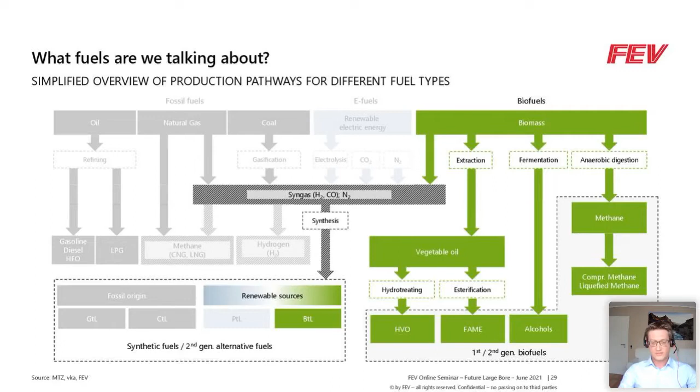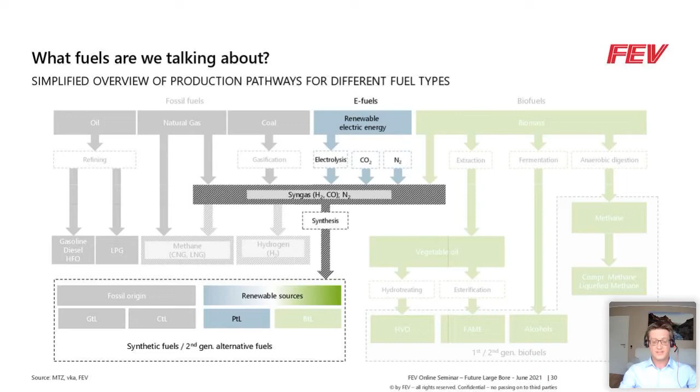E-fuels are what pretty much everybody is currently talking about, and the main characteristic of e-fuels is that the basis for all e-fuels is green hydrogen, derived from water electrolysis by means of renewable electricity. By combining the green hydrogen either with carbon dioxide or with nitrogen, you can produce pretty much all types of molecules that might be suitable as fuel for internal combustion engines. As indicated, there is not the one e-fuel or the one synthetic fuel. You can really produce many different molecules that are suitable as fuel.

But what they all have in common when produced from renewable sources is that they typically contain no or only extremely low amounts of sulfur. And because the share of high boiling components or aromatics is also significantly reduced, usually all these types of fuels combust significantly cleaner than the fuels we are using today. I'll now briefly talk you through the fuels that seem most promising for medium speed applications, and my colleague Arne Güdden will later talk a bit more about thermodynamics and specifications of some of these fuels.

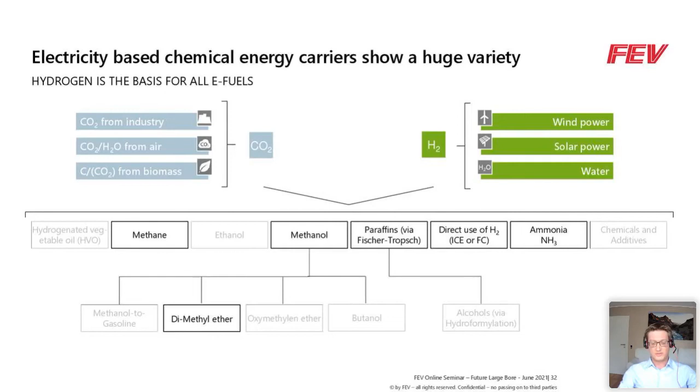Starting with hydrogen, that of course is the simplest e-fuel, if you want. Talking about a green economy, hydrogen will for sure play a very important role in the future, not only for energy storage in the grid, but also for mobile applications. Japan announced that they will import very large amounts of hydrogen from Australia. So it's no surprise that Kawasaki is planning to build a deep sea going liquid hydrogen carrier that will also be operated with liquid hydrogen. And the world's first hydrogen-powered vessel will go into operation by 2024 from the consortium with Orca, powered by nature.

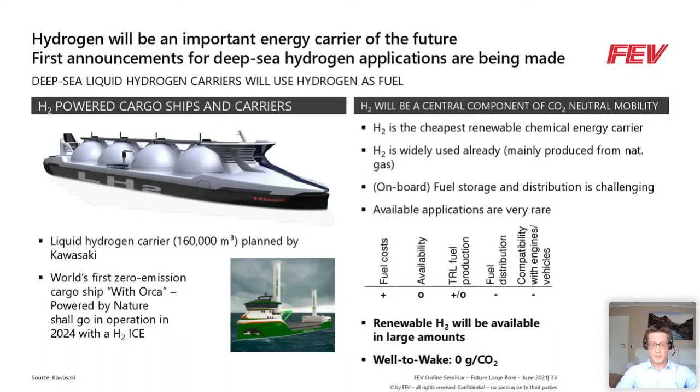The other fuel that is inherently CO2 free while combusting is ammonia. Ammonia has also been used already as fuel, mainly during World War II, not because it's the perfect fuel, just because there wasn't any alternative at that time. Due to its ignition and combustion characteristics, it requires a sophisticated ignition system, such as dual fuel. I think Arne will touch on this later on in a little bit more detail.

Moreover, due to its quite low flame speed, it's also not suitable for applications with very high revolutions, but rather medium speed or even low speed applications. In fact, ammonia is pretty much a hydrogen carrier, since nitrogen itself doesn't actively take part in combustion. So ammonia is, of course, a little bit more expensive than hydrogen, but cheaper than some other e-fuels. The reason for this is that air separation is way easier if you have 78% nitrogen in the atmosphere rather than 400 ppm carbon dioxide.

Currently, ammonia is produced on the megaton scale already, and it's mainly used as fertilizer. It's shipped around the world. So infrastructure would be available, but the downside of ammonia is mainly its toxicity; already very low concentrations of only about 20 ppm are toxic for human and sea life. So there are quite high requirements for safety installations and handling. So ammonia might be an interesting option for large applications or mining sites, for instance, with their own fuel production, far away from civil population.

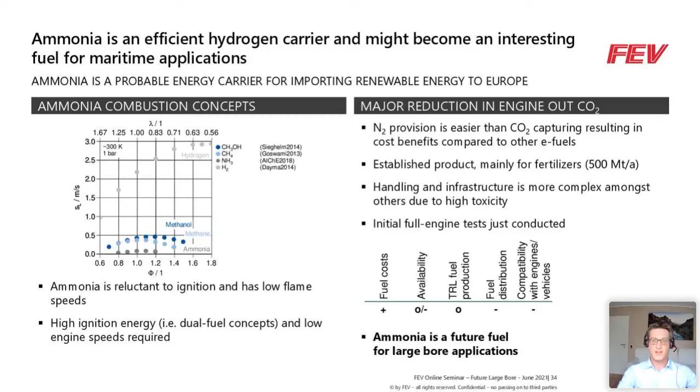Initial engine tests are currently ongoing at full engine test sites. But of course, there are also some pilot and demonstration projects ongoing, such as this ammonia and hydrogen fueled tractor operated on a farm in the United States. They synthesize the fuel pretty much all electric on their own farm, making use of a conventional Haber-Bosch process, the way you do it on an industrial scale already today. The ammonia not used as fuel on the farm is then directly used as fertilizer for the crops. The tractor you see in this picture runs on hydrogen and ammonia, spark ignited.

As you can see, it requires quite a lot of additional fuel storage volume. We talked about the energy density of hydrogen already. Also, the energy density of ammonia is roughly 1/4 of conventional diesel fuel, even in liquefied form.

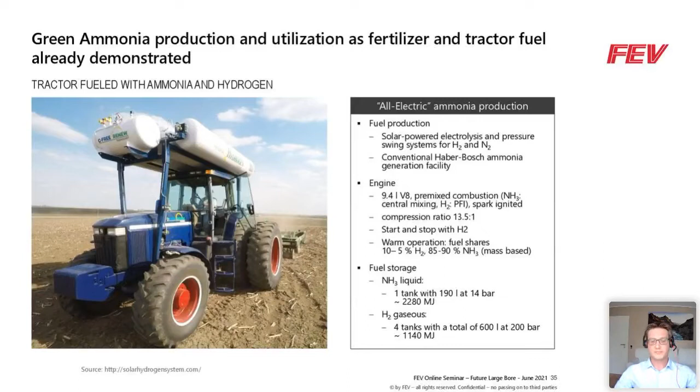The next fuel we're talking about is also gaseous and quite well known: natural gas or methane. Engines running on this fuel have been on the market for years already. Natural gas also enables quite low pollutant emissions. Currently, natural gas is of course a fossil resource, so it's not CO2 free, also not from well to wheel, but it is currently very cost competitive with other fossil fuels. Based on its molecular structure and combustion, it can enable CO2 reduction of up to 15% compared to other liquid fossil fuels.

Talking about synthetic methane, made from renewables: methane is of course a quite simple molecule, but the Sabatier process we would use to produce methane from carbon dioxide and hydrogen is quite energy intense, so it's not the cheapest molecule you can choose. It's a little bit more expensive than other e-fuels we're going to talk about. The good side is that natural gas is available in very large amounts today already, and the grid is very well developed worldwide. So in fact, natural gas would be the only fuel that could be brought into the market on a very large scale, very fast, effectively reducing CO2 emissions by up to 15% with current technologies.

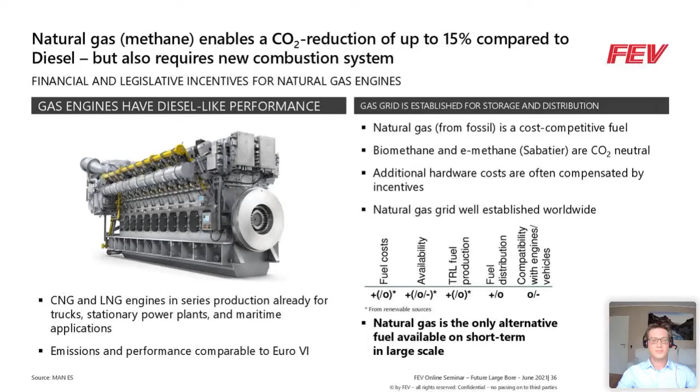With that, we're coming now to the first liquid fuel, which is methanol. Methanol is also used as fuel already, from passenger cars to heavy duty applications to deep sea vessels around the world. There are a couple of methanol powered vessels on the oceans already, I think roughly 5 to 7. Announcements for methanol powered carriers are currently being made, so within the next years there will be more than a dozen methanol operated vessels on the oceans. Methanol is available in more than 100 harbors around the world, also because it is an established product for the chemical industry, traded on a roughly 100 million ton scale already.

Methanol synthesis is also well known. Currently, it's mainly produced from natural gas and coal, but the process would not change if you took hydrogen and carbon dioxide to produce green methanol. The downside of methanol is that it's considered to be toxic. In fact, it's not methanol as such that's toxic, but its metabolic products. Also, it burns with an invisible flame, so here too handling and safety installations have to be kept an eye on. It is anticipated that safety installations will have to fulfill higher criteria than they currently do for conventional diesel fuel applications. So far, applications for pure methanol operation are still limited.

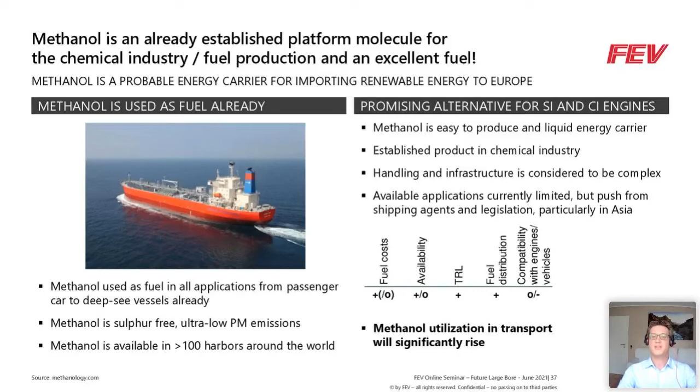We do see a push mainly from Asia, for passenger car and heavy duty applications, but also for maritime applications. And since methanol is a liquid energy carrier that is very easy to store and easy to transport, we think that methanol will be used to import and export green energy in liquid form. For that reason, methanol will surely have its place in future transport.

The derivative of methanol is DME, dimethyl ether. Its physical characteristics are somewhat similar to LPG. So you have to pressurize DME to around 5 bar to get it in liquid state. But simultaneously, it's got a cetane number quite like diesel.

So for that reason, DME has been investigated around the world, from passenger car applications to heavy duty applications, and also for shipping applications, like in the research project shown on that slide. They produced DME on board via methanol reforming with a technology provided by Haldor Topsøe. And they used it in an only very slightly adapted diesel auxiliary engine to operate the auxiliary devices on board directly. So overall, DME is used worldwide in different applications.

So for the United States, there's a fuel standard available already. Volvo investigated this intensively. Currently, from automotive side, Ford is significantly pushing this fuel type, also trying to certify DME as fuel over here in Europe. In Asia, DME is used as cooking gas quite broadly, like we do it here with kind of LPG.

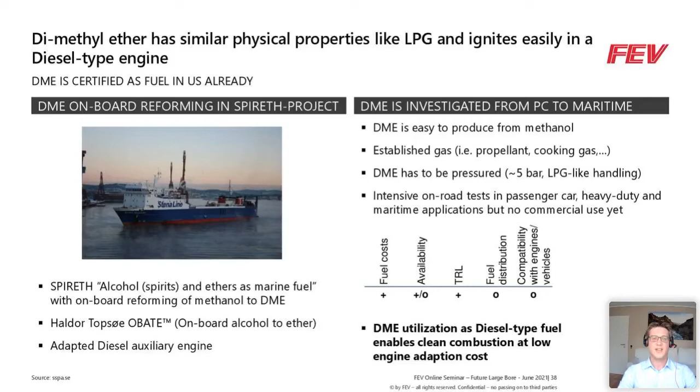Coming to infrastructure and availability of infrastructure. So the best fuel you could think of would be, of course, a fuel that you can directly use in today's infrastructure without any change. And there's pretty much one fuel that fulfills the criteria, and that are paraffinic diesel type fuels produced via the Fischer-Tropsch process. Fischer-Tropsch diesel are kind of drop-in fuels for all diesel applications worldwide.

The downside is that the Fischer-Tropsch process is also quite energy intense, and that makes Fischer-Tropsch fuels to be at the upper range of the fuel production costs, actually. The technology as such is widely known and robust for more than 100 years already. And for Fischer-Tropsch fuels, you might also have more customers at hand, because Fischer-Tropsch fuels are the only liquid fuels that also can be used in aviation. So once ramping up that technology, for sure, there will be a customer at the end buying the product.

Still, when you're looking at the fuel costs, where TCO are of highest importance, Fischer-Tropsch fuels for sure will not be an option. But thinking about yachts, for instance, that have to be refilled every now and then, other leisure boats, or if you have backup power generation, then Fischer-Tropsch fuels might be a very viable solution.

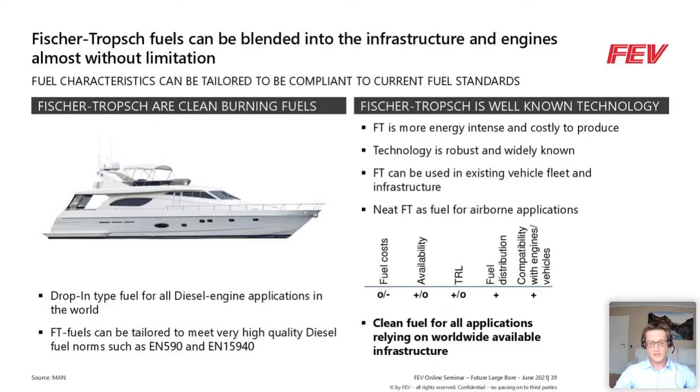So now you might say, okay, fuels are not available. We have had a question pointing in that direction previously. Of course, the fuels currently are not yet available in large scale amounts. The main reason behind this is that there's no one along the value chain who would actually really benefit currently from using or producing synthetic fuels. So politics around the world have to create incentives that there will be an investment in producing such synthetic fuels. But still, we see that there are more and more announcements made. Synthetic fuel production will ramp up.

On the left side of that slide, you can see a figure coming from Fuels Europe. They state that within the next 30 years, we would be able to have 100% of the non-electrified road transport be fueled with CO2 neutral synthetic fuels. And also the target that Andreas pointed on, 50% CO2 reduction for maritime and aviation by 2050, will also be possible by means of synthetic fuels if there would be an incentive to really start off the investments.

Of course, talking about investments, investments we would have to take are significant and really high, but compared to an all-electric propulsion across all applications, it's still cheap, with an anticipated investment of somewhere between 400 to 650 billion euro. On the right-hand side, you see the screenshot of an announced project that is ongoing already, that gained quite high interest in media.

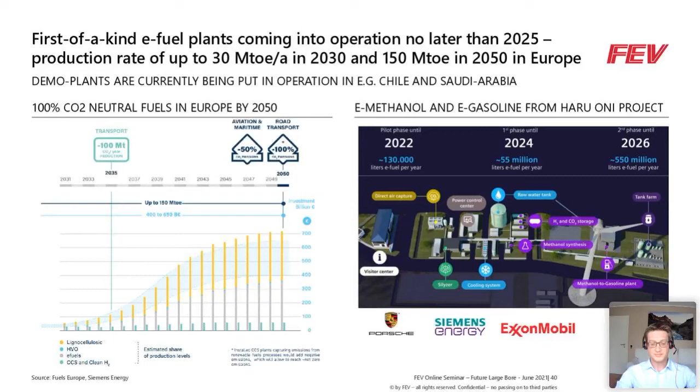So in addition to the critique that the fuels are just not available, we often hear also the critique that e-fuel production is inefficient. Where should all the energy come from? Of course, making direct use of renewable electricity in the powertrain would be more efficient, but often that is just not possible.

You can't electrify all the propulsion systems we do have. And obviously, we are not lacking energy in the world. We just have to make use of the sweet spots like Australia, MENA states, and for photovoltaics, Chile, for instance, for wind power. And given the average solar radiation and photovoltaic efficiency, on the right picture, you can see a blue square, and that blue square would be required for photovoltaic installation to cover the total electricity demand of the world by 2050. So in my view, a rather small spot if you compare to the world landscape.

If you're now going to the extreme and saying, okay, all the energy consumed in the world by 2050 has to be provided by e-fuels, so all the landscape required for hydrogen production, for running the facilities and whatsoever, that would be equal to the 4 red squares you see. You see that very much in the Sahara Desert. You would of course split that to different regions of the world. I said already, Australia, North America, wherever.

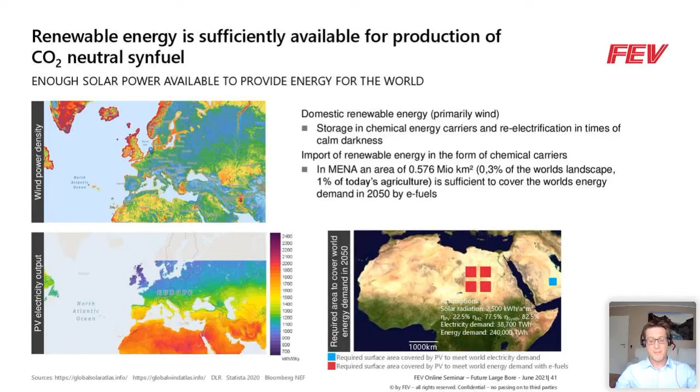What might be more interesting than the efficiency is, of course, the price and the cost. That is where it all ends with. Of course, synthetic energy carriers or synthetic fuels will be more expensive than fossil ones, at least looking from the perspective we are having now. This will not easily change unless politics will create incentives like taxation on fossil-based CO2 emissions. This is currently popping up, and we expect that this is getting more stringent, that the CO2 price is going to be increased. This then directly will be an incentive for making use of synthetic fuels or of green fuels.

Looking at the fuel production cost for fuels just discussed, we see that hydrogen, of course, is the cheapest one with possible production cost of way below €1 per liter diesel equivalent, followed by methanol and ammonia. And compared to fossil fuels, the costs are currently somewhat doubled or even tripled. But this for sure will change after 2025, what that picture is actually belonging to. And based on this chart, you would say, of course, we're going with hydrogen, the cheapest option we can get.

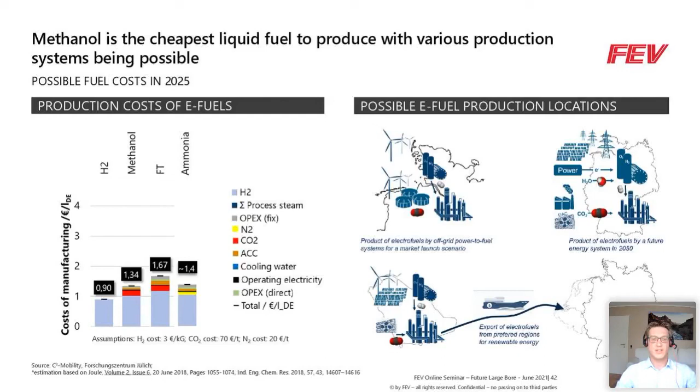But as I said before, it's very likely that we will import green energy and that we will ship green energy around the world where we cannot make use of a DC-DC cable. And taking into account shipping, like shown at the lower figure on the right-hand side of the graph, the picture might change a little bit. And this is given over here in this slide. Here we have compared the production and shipping costs for green hydrogen and green methanol. And for methanol, we have also looked into different CO2 costs, so to extract that from a point source or from the air or whatsoever.

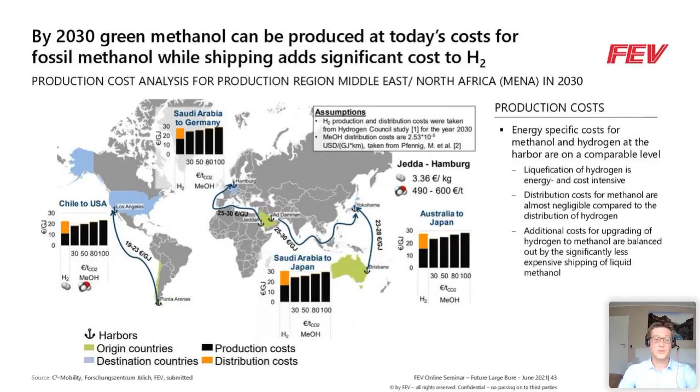Overall, up to CO2 price of about €100 per ton, methanol can be shipped around the world at even lower prices than liquid hydrogen. So also that one should take into account when talking about what fuel to use and where to produce energy and where to actually use energy in what form around the world. So now you can ask what fuel to use. Yeah, what fuel is the best? Andreas also touched on this question before slightly.

Still, be sure that there will be a wide variety of different fuels in the future, and most likely even more diverse than what we use today. There's no one-fits-all solution, no one-fits-all fuel. It really comes down to choosing the best fuel for the specific application.